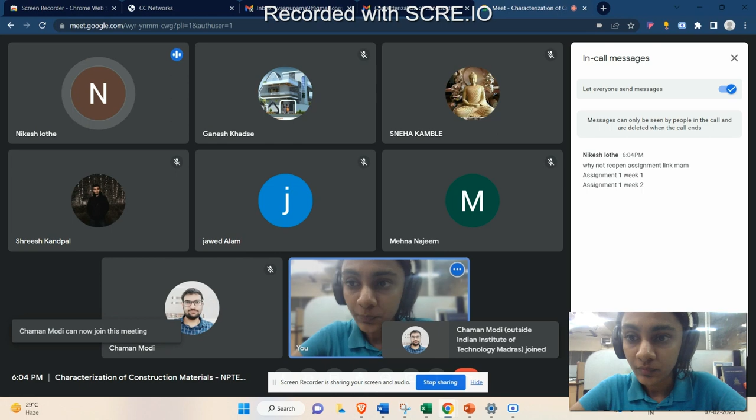Yeah, then it should be open. It has to be open. Is it the same for all the others? Then I'll raise the issue to the NPTEL coordinator team. If it is just for you, then you might have to try a different browser or try at a different time. Maybe the network is poor, something like that.

Okay. So let me try to share the screen. Please resend link. Yeah. Is the screen visible to you? No. No, ma'am. One second. Yes. Is the screen visible to you now? Yes, ma'am. Okay. So I'll just adjust it such that I can see the chat box and also the question screen.

So yeah. So this is a Characterization of Construction Materials course, and in the week one, it was just an overview. We didn't go in detail about the construction techniques. Instead, we just introduced what are the different construction materials which we will be dealing with, right? So, for example, the professor talked about cement, different composition of cement, then concrete, and also steel, polymers, asphalt, etc.

So, from all the content which was shared in week one, we have a few questions. So, I'll share the question on the screen in the slide form. You can see the question. I'll also explain the question through mic. So whichever you see as a right answer, you can mention it in the chat box. Okay. So moving on to the first question.

As per the cement chemistry notation, F denotes option A iron, option B FeO, option C Fe2O3, and option D Fe3O4. Okay, thank you, Shreesh. Shreesh has told that it is option C. Okay, I'm waiting for the others' replies. Chaman has also replied that it is C, which is Fe2O3. We have 8 attendees in the meet. So if you can respond in the chat box or through mic, it'll be good.

Okay, Sneha. So I guess majority goes with the option C, which is fairly easy. So the correct answer is C. As we know, cement chemistry notations are quite different from the usual chemical notations of elements. So C is not carbon, it is calcium oxide as per the cement chemistry notation. Similarly, S is not sulfur, it is silica or silicon dioxide. And alumina is A. F is Fe2O3 and it is not iron, Fe.

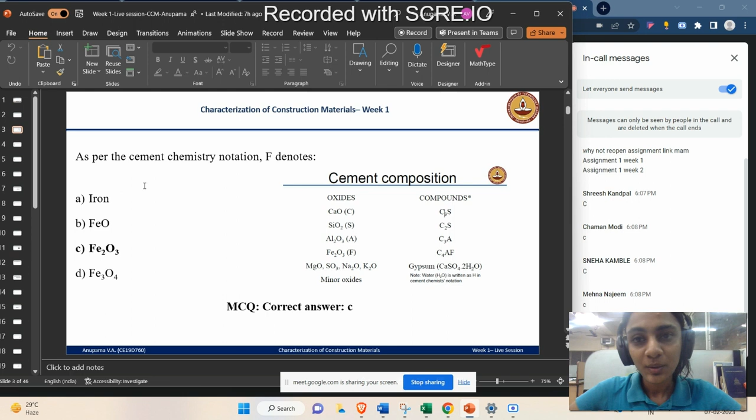The hydration product which regulates the alkalinity of ordinary Portland cement concrete is blank. CSH, CH, Ettringite, or gypsum. So we know that ordinary Portland cement concrete has a higher alkalinity. It has a high pH. And what is the hydration product in the ordinary Portland cement which causes higher pH or a higher alkalinity? Option A, CSH. Option B, CH. Option C, Ettringite. And option D, gypsum. So, which is the hydration product which regulates the alkalinity?

Okay, Shreesh and Chaman had commented that it's option B or CH. So, what is CH? Can someone type in the chat box? What is CH? Yes, Portlandite or calcium hydroxide. So, anyone else wants to comment? Is it CSH, CH, or Ettringite or gypsum which regulates the alkalinity?

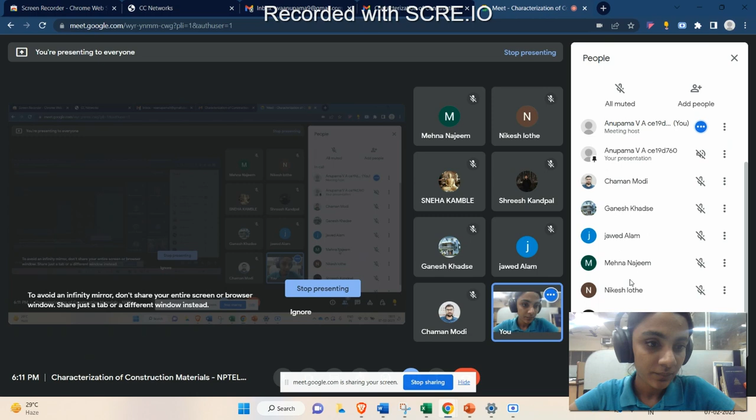Okay, I guess that is the response I'm getting. No more responses. Okay. Anyone else?

Okay. So it is calcium hydroxide or CH or Portlandite which results in the higher alkalinity of ordinary Portland cement concrete. It's not CSH, Ettringite or gypsum, it is calcium hydroxide. You must be quite familiar if you have taken basic or even advanced courses about concrete technology, that calcium hydroxide provides the basicity or alkalinity to the ordinary Portland cement concrete.

Thank you, Shreesh and Chaman, for responding in the chat box. So let's move to the next question.

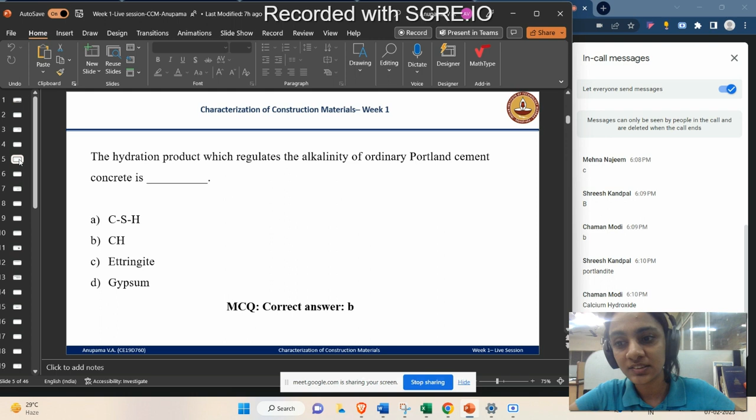The phase of the cement which contributes to the early strength and stiffening, and which has a high heat of hydration also. C3A, C3S, C2S, or C4AF. C3A is tricalcium aluminate, C3S is tricalcium silicate, C2S is dicalcium silicate, and C4AF is tetracalcium aluminoferrite.

So again, Shreesh and Chaman have gone with option A, that is C3A. Let's wait for a minute for hearing other opinions as well. Okay, Sneha also goes with C3A. Ganesh goes with A. Does anyone else want to respond? Okay, Mehna goes with A.

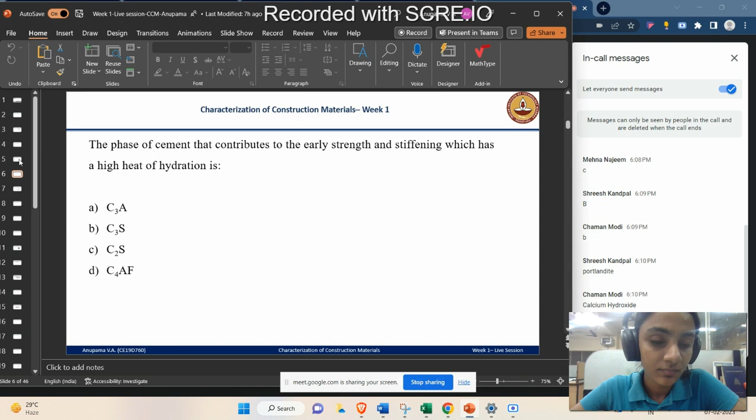Okay, now let's move to the correct answer. The correct answer is option A. So C3A is responsible for the early strength and stiffening. C3S is also responsible for early strength, but more than that, it's C3A which has a very high heat of hydration and also contributes to early stiffening. Okay, moving on to the next question.

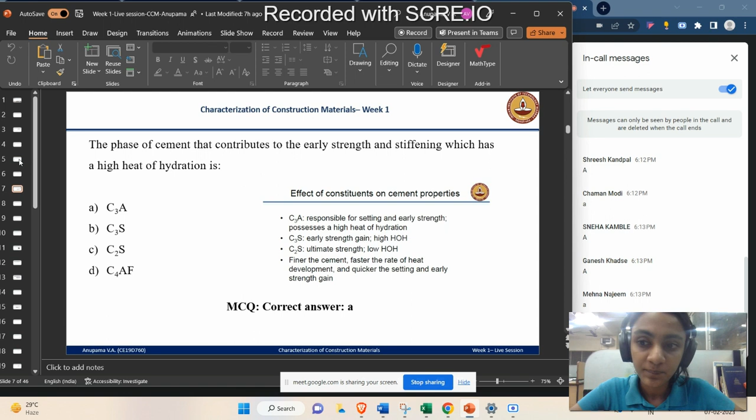Dimensional stability of a concrete is attributed to the aggregates present in it. State true or false. So, any concrete structure has got its dimensional stability. So, are aggregates a reason for the dimensional stability of a concrete? State true or false. Okay. So, Shreesh, Chaman, and Ganesh had gone with true, and Sneha as well.

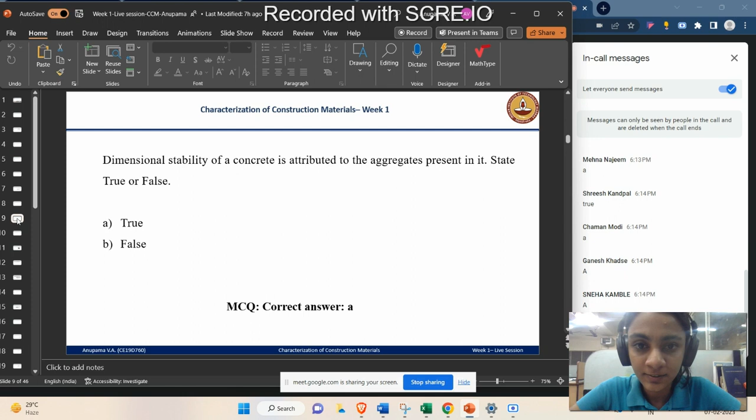Excuse me. Okay. Let's move to the correct answer. Correct answer is A, which is true. Aggregates are responsible for the dimensional stability because paste can be deformed and it binds the aggregates and the particles in the concrete, whereas aggregates cannot be deformed and they provide the stability in dimension for the concrete member. So let's move to the next question.

Okay, this is more related to characterization. In the backscattered image of an ordinary Portland cement concrete, pores in the hydrated cement paste are X color and unhydrated cement grains are Y color. So identify X and Y. X is black, Y is white. Then X is white, Y is black. Then X is gray, Y is white. Then X is black and Y is gray.

Okay, Shreesh went with option C, Chaman with option A. Okay, now this is the first question with different opinions. Shreesh also changed to A, Ganesh A. So now everyone goes with A. Do we have any other difference of opinion from someone?

So make sure you understand what feature we are referring to here. One is a pore, the other one is an unhydrated cement grain. Also, it's backscattered imaging.

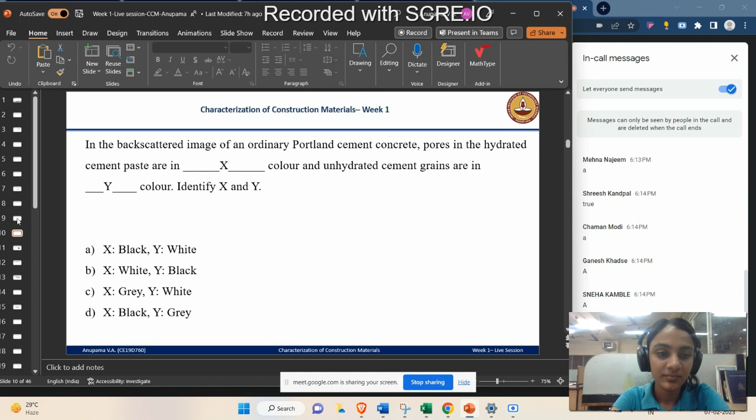So far we have received only three responses. What happened to others? It's okay even if the answers go wrong. Consider this as a practice session. That's all the response I'm going to get, I guess.

Okay, so let's move to the correct answer. Correct answer is A. This is also a snippet from the slide. If you see, there is a black semicircle, which actually is a pore. So what happens in backscattered imaging? It provides the image based on the density difference of the material. In a pore there is nothing to scatter back, so it shows in black, whereas cement grains are very highly dense and much brighter. So the denser phase, that is a cement grain, will be shown in white.

All the other hydration products will have a density ranging between that of a pore and that of an unhydrated cement grain, as a result of which they will be shown in different shades of gray or ash. So here all these small white elements are unhydrated cement grains, and the black one is a pore. Keep that in mind. A pore is black and an unhydrated cement grain is white in backscattered imaging. So the correct answer is A.

Thank you guys for responding. Now moving on to the next question.

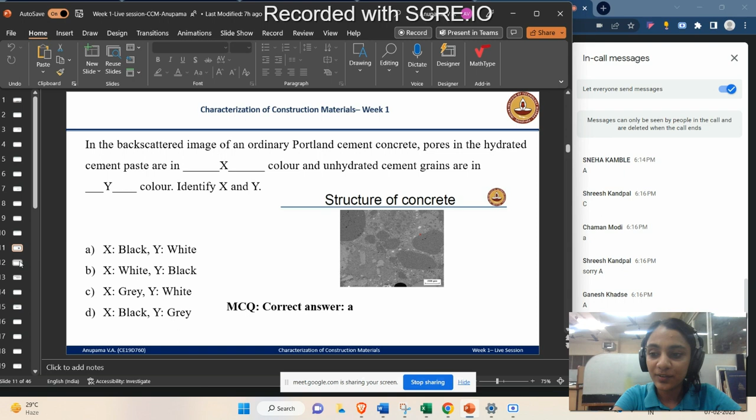The pores present within the hydration products in the ordinary Portland cement concrete are known as X. Identify X from the options given below. What is X? Are they air voids, or are they gel pores, or are they capillary pores? So here we told that the pores are black in color, but pores exclusively within the hydration products, what are they known as? Are they air voids, gel pores, or capillary pores?

Okay. Shreesh has commented that it is gel pores. Okay, let's wait for more response from others. Okay, Ganesh told it is capillary pores. Anyone else? Okay, I'll wait for a minute. Let me see. Please feel free to respond in the chat box. Even if it goes wrong, it is okay. That's all. No one else is planning to respond.

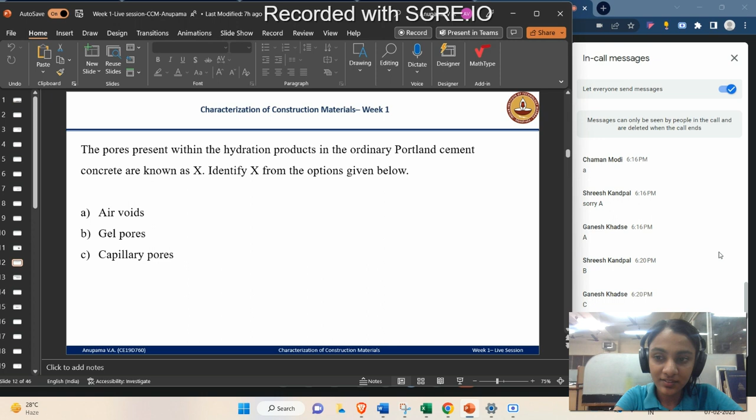So within the hydration product, that is say CSH, there are so many pores that they are known as gel pores. But outside the hydration product, that is within the cement paste itself, other pores are there and they are known as capillary pores. So cement paste is composed of two types of pores. One is a capillary pore and the other one is a gel pore.

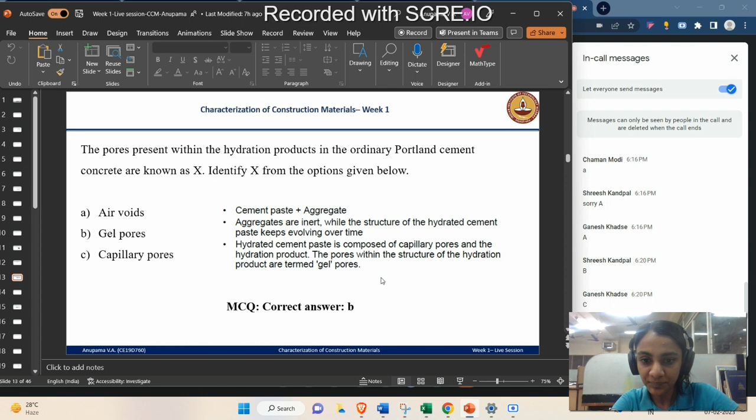Okay, so next question is also related to pores itself. With reference to the previous question, what is the pore which is present within the hydration product? So according to Powers, what percentage of the total pores are X? So X is now gel pores. According to Powers, what percentage of the total pores are X? 25 percentage, 50 percentage, 33.33 percentage, or 66.66 percentage.

Okay. Shrish commented that it is C, that is 33.33 percentage. Excuse me. Okay, Sneha also commented it is C. Let me wait for a little more. Ganesh also commented it is C. What about others? Does anyone say it is 66.66? Okay, I'll wait for less than a minute, maybe. Yeah, I guess not sure. Okay, let's see.

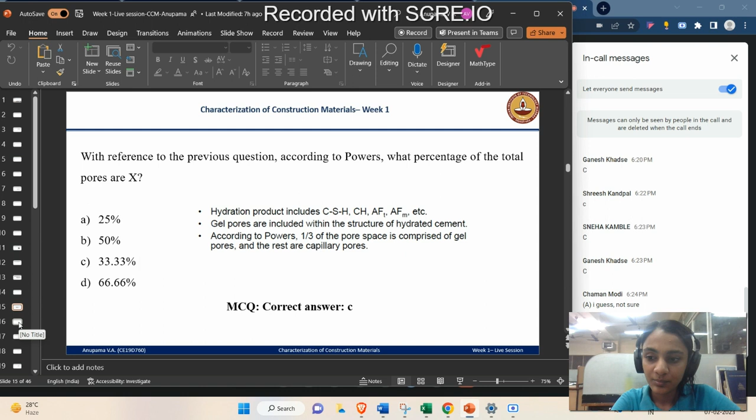Okay, moving on to the next question. Tar dissolves in gasoline, whereas asphalt does not. State true or false? The question is tar dissolves in gasoline, whereas asphalt does not. State true or false?

Okay, Ganesh and Shrish go with true. Chaman also goes with true. Sneha goes with true. Okay, let me wait for a little bit more time.

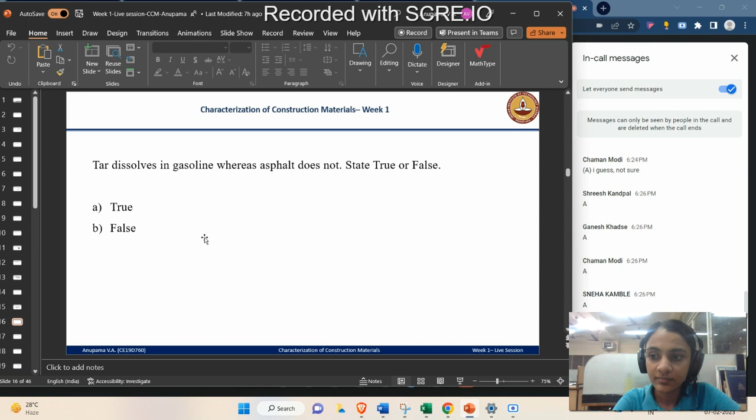Okay, the correct answer is false.

Okay, there's a new person. He or she had gone with A. What's your name? I couldn't get it. The newly joined one, can you type your name? Like how I should call you out? Yeshu Kumar. Okay, fine. Thank you.

So this is the refining stages of asphalt. From liquid gas or propane, it becomes naphtha, then petrol, then kerosene oil, grease, and then it becomes asphalt. So it has been refined from gasoline, which means that it can further dissolve in gasoline also.

That is why, in the case of asphalt pavements, suppose there is petrol dripping from some vehicle, the asphalt can dissolve in that petrol, and that particular area of the flexible pavement or the asphalt pavement can deteriorate. That is because if there is no top surface protection layer, if it is just asphalt, then it can dissolve in the gasoline and deteriorate the pavement.

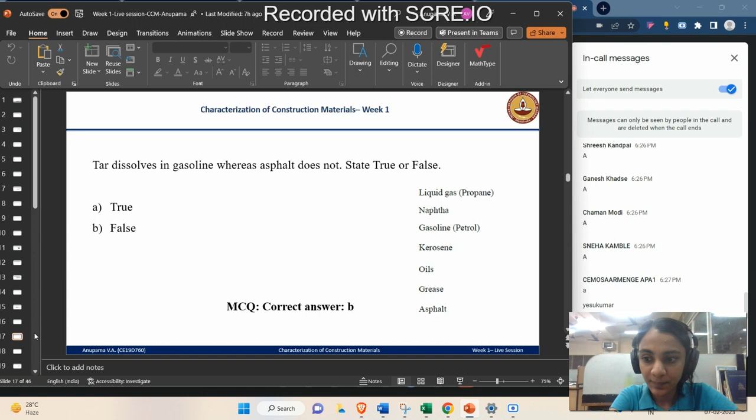So that is why the asphalt tends to deteriorate in the presence of gasoline or when gasoline falls over the asphalt layer. So the correct answer is B, which is false. Okay, moving on to the next question.

Suspending asphalt in water using an emulsifying agent dash. It increases the viscosity of the asphalt, it decreases the viscosity of the asphalt, or it does not alter the viscosity of asphalt. So, what does asphalt suspension in water using an emulsifying agent do? Does it increase the viscosity? Does it decrease the viscosity? Or it does not alter the viscosity of asphalt?

Okay, Chaman goes with does not alter. Shrish and Ganesh go with decreases the viscosity. Okay, now let's wait to hear others' opinion. Okay, Yeshu Kumar goes with increases the viscosity. Okay, any other response? Any other opinion from others?

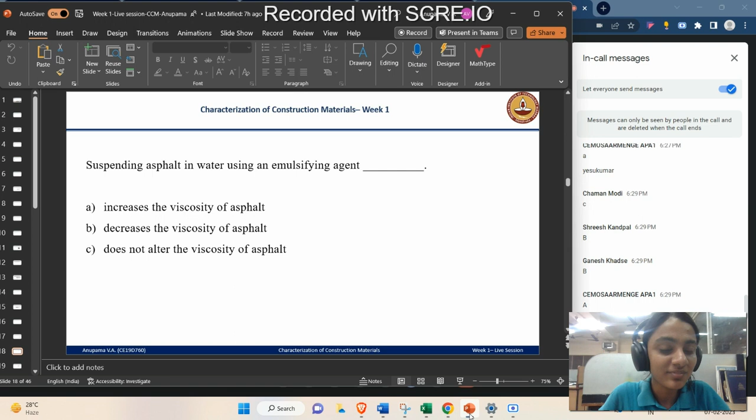So the question is pretty simple. Using an emulsifying agent, if you just suspend asphalt in water, what does it do? Does it alter the viscosity? Option A says it increases the viscosity. Option B says it decreases the viscosity. And option C says it does not quite alter the viscosity of asphalt. And we have got all the three options as answers from the chat box. So, yeah. Okay, without further ado, let's move to the correct answer.

The correct answer is that it decreases the viscosity of the asphalt. So it becomes much easier to work with if you decrease the viscosity. So if you see the asphalt properties slide, the second point indicates techniques to lower viscosity, and the second one is making an emulsion. Okay, so keep that in mind. If you make it an emulsion, by suspending asphalt in water using an emulsifying agent, then it decreases the viscosity. Okay, so moving on to the next question.

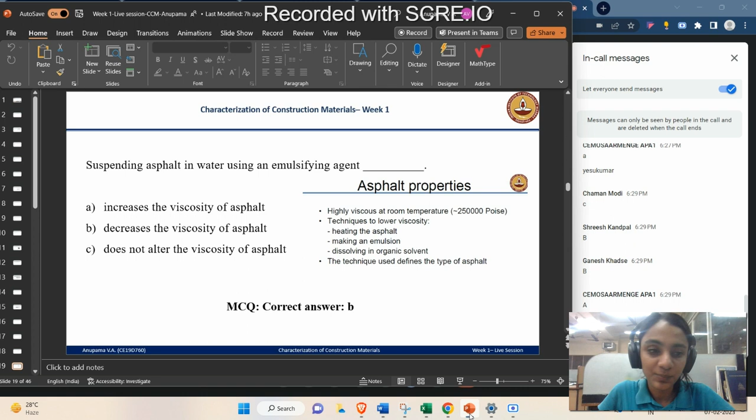Crude oils are considered to be asphaltic when the asphalt content is greater than 60 percentage, greater than 50 percentage, greater than 70 percentage, or greater than 55 percentage. So we refer to crude oil as asphaltic if the asphalt content is greater than 60 percentage or 50 percentage or 70 percentage or 55 percentage.

Okay, Shrish has commented that we call them asphaltic if the asphalt content is greater than 60 percentage. Okay, Ganesh commented that if it is greater than 55 percentage, we call them asphaltic. Okay, who else? Excuse me. Okay, Yeshu Kumar says it is greater than 50 percentage. Okay, anyone says it is greater than 70 percentage?

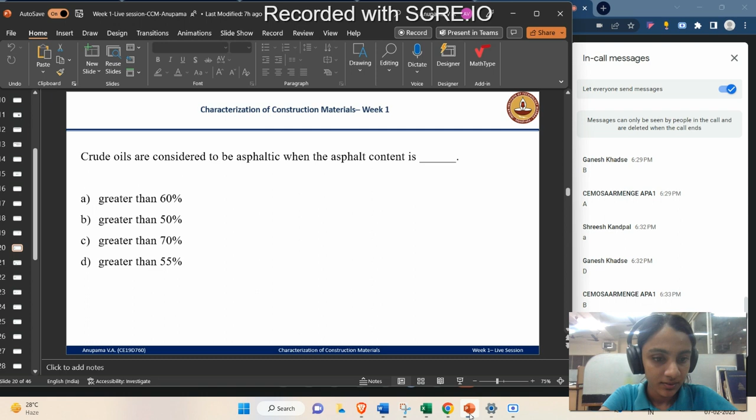Okay, let's wait for a few more seconds before going to the correct answer. Excuse me. Okay, let's move to the correct answer.

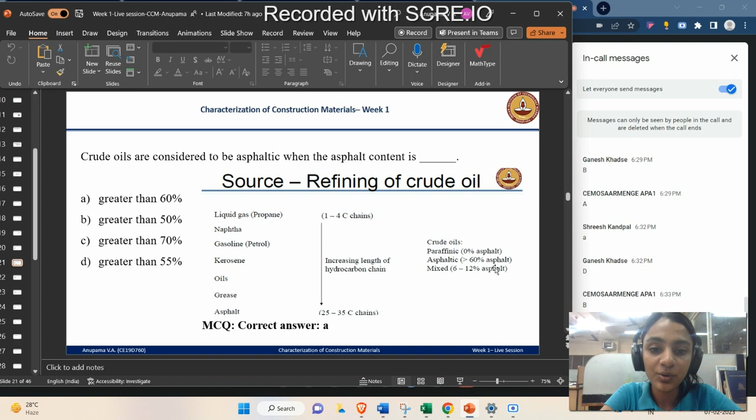The correct answer is option A, that is greater than 60 percentage. So if you see here, this is a snippet from the slide. So crude oil is paraffinic if it has 0 percentage asphalt, and if it has 60 percentage asphalt or more, it's known as asphaltic. And if it is 6 to 12 percentage asphalt content, then it is a mixed crude oil. Okay, so keep that in mind. If it is greater than 60 percentage, then the crude oil is known as asphaltic. Okay, let's move to the next question.

To get a homogeneous asphalt concrete mix, the placement temperature must be between 70 degrees Celsius to 80 degrees Celsius, or 80 to 100, or 100 to 125, or 125 to 150. So this is regarding the placement temperature of asphalt concrete mix. What we all need is a homogeneous mixture. We don't want lumps. We don't want heavy viscous and then changing to low viscous, etc. What we need is a homogeneous mixture.

So to get a homogeneous mixture, the placement temperature has to be between 70 to 80, 80 to 100, 100 to 125, or 125 to 150. I'm waiting for responses. Anyone? Okay, now I'm confused. Okay, Yeshu Kumar commented it has to be between 100 and 125. Shreesh comments it's between 125 and 150. Okay. Ganesh goes with 80 and 100. Okay, interesting. So, anyone for option A?

What about the girls? I'm not seeing anyone in the chat box. Some used to answer. What happened to them? Where is Mehna, Harshita, Sneha? Okay, let's give them a few more seconds.

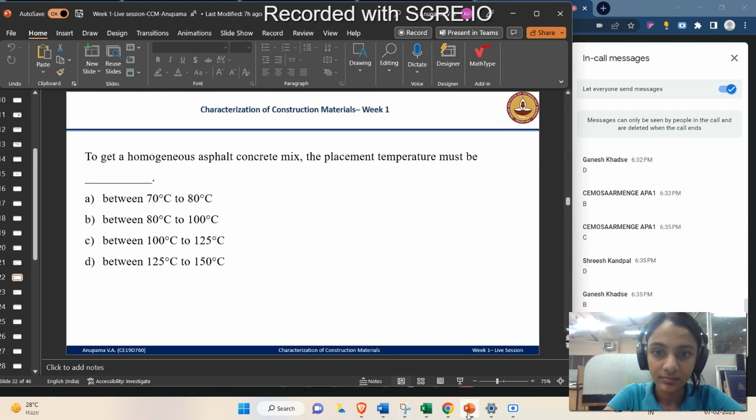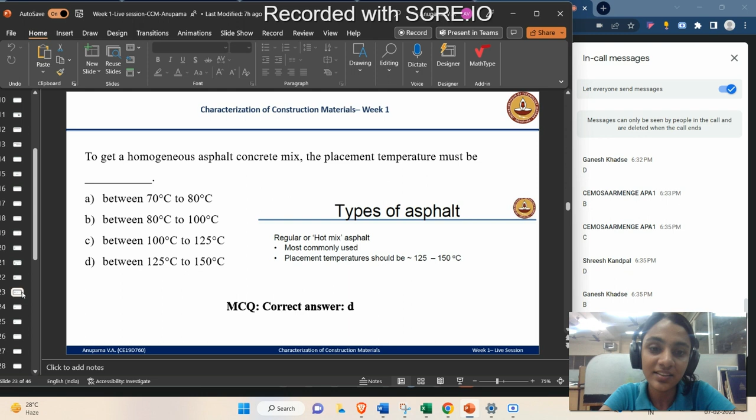Okay, let's move to the correct answer. The correct answer is option D, between 125 and 150 degrees Celsius. Okay, to get a homogeneous mixture, the temperature has to be between 125 and 150 degrees Celsius. Okay, let's move to the next question.

Now, with reference to the previous question, it's regarding the placement temperature of asphalt concrete. At that range of temperature, asphalt exists as glassy solid, viscoelastic liquid, or Newtonian fluid. So you know now that the temperature range which we are talking about is 125 to 150 degrees Celsius. So what is the state of asphalt at that temperature? Is it a glassy solid, or viscoelastic solid, or viscoelastic liquid, or Newtonian fluid?

Okay. So Chaman went with viscoelastic solid. Thank you for responding in the chat box. What about others? Okay, now everyone goes with viscoelastic solid. Mehna and Sneha. Ganesh also goes with viscoelastic solid. Shreesh goes with viscoelastic liquid. Okay, I think we have given enough time to answer. So let's move to the correct answer.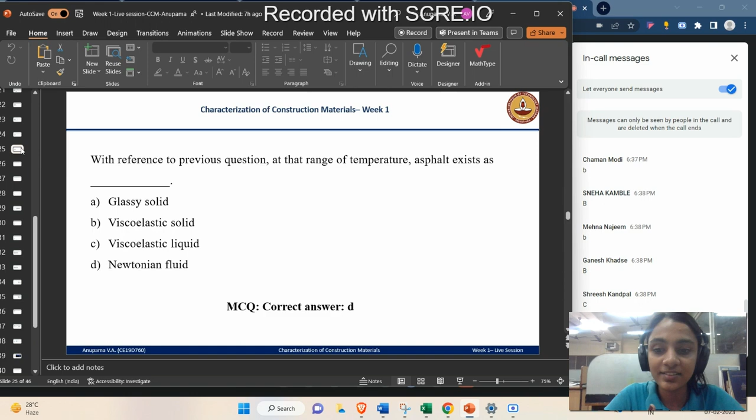So then it changes from viscoelastic solid to viscoelastic liquid. Then finally it becomes a Newtonian fluid. So the correct answer is option D. Okay, let's move to the next question.

The fatigue resistance of asphalt concrete pavement increases with the load repetitions. So this is quite interesting, right? When the number of load repetitions increases, we think it will wear and tear. That set apart, the fatigue resistance of the asphalt concrete also tends to increase. Why does it happen so? First, binder hardness increases. Secondly, aggregate hardness increases. Or air voids between the binder and the aggregate collapse or decrease. Or option D, asphalt changes from viscoelastic solid to a glassy solid.

Okay, let's see. Shreesh and Chaman went with option C, that is the air voids between the binder and the aggregates decrease. Anyone else? Okay, Jawed goes with aggregate hardness increases. What about others? Anyone else? Ganesh goes with binder hardness increases. Okay, so let's move to the correct answer.

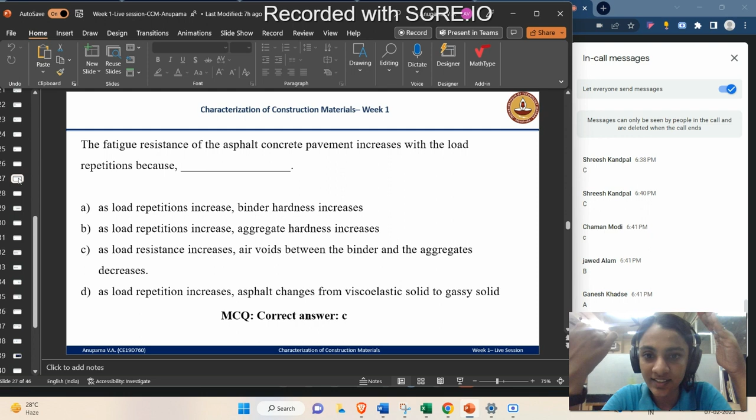Correct answer is option number C. See, the binder hardness cannot change, and the aggregate hardness also is something which does not undergo a change of properties if you keep on increasing the load repetitions. So what logically can happen when the number of load repetitions increases is that there will be some air voids between the aggregate and the binder. Those will collapse, or the gap becomes lesser and lesser. So the air voids tend to decrease with the number of load repetitions.

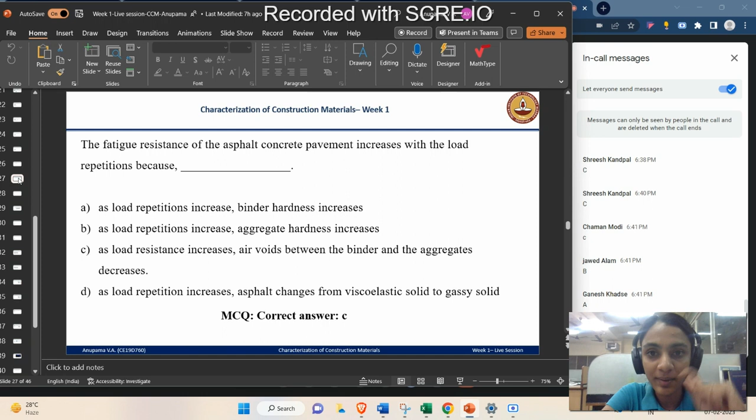So as a result of which, the fatigue resistance of the asphalt concrete increases with the load repetitions. So the correct answer is option C. Those who have told other options, please stay corrected. So fatigue resistance of the asphalt concrete increases with load repetitions because the air voids between the binder and the aggregate decrease. Okay, so let's move to the next question.

How much percentage of carbon is present in alpha iron at room temperature? So it's a pretty straightforward question. In alpha iron at room temperature, how much is the percentage of carbon? Is it 50 percentage, 0 percentage, 65 percentage, or 67.7 percentage? It's a pretty straightforward question. Not much of logic or thought needs to be put to answer this.

Okay, Chaman goes with option B, that is 0 percentage. Anyone else? Okay, Shreesh also goes with B, that is 0 percentage. Okay, or D, I'm confused. I think it's just the human brain: when you see something which is not conforming to the other options, 67.7 percentage, where did it come from? So I get where the confusion comes from. Okay, let's see. I'll wait for a few more seconds.

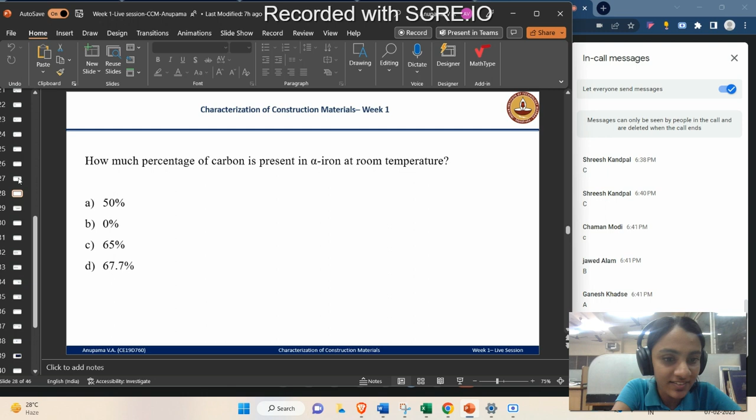Okay, I think that's all I'm getting. Everyone else seems to be confused. So the correct answer is option B. D is not the correct answer. It's option B because at room temperature, it is the purest form of iron, that is alpha iron.

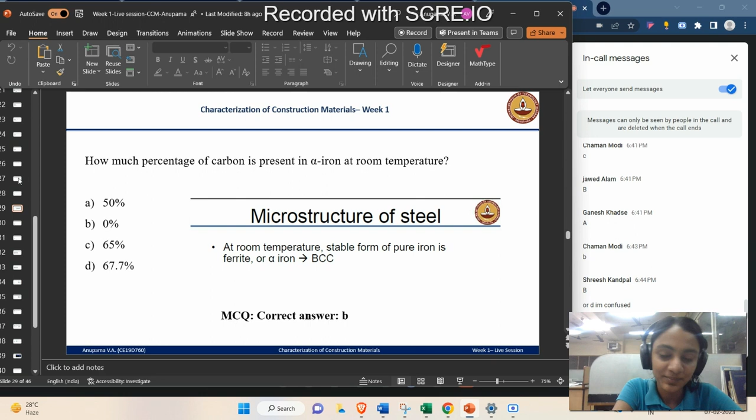It has no carbon content, or even if it has, it's a very minute level of carbon content, and we can say in 99 percent of cases there is zero carbon content in the case of alpha iron. So it is the purest form of iron, alpha iron, and at room temperature there's no carbon content in it. That is 0 percent. Okay. So moving on to the next question.

What material property is introduced by the addition of carbon to iron in the manufacturing of steel? Is it malleability, ductility, toughness, or hardness? So, it's about the property which gets introduced by the addition of carbon to iron in the steel manufacturing process. So, Shreesh again commented it is D, hardness. Okay. Anyone else?

So basically, what he says is that by adding carbon, we are improving the hardness, or we are imparting hardness to the iron or the composite. Okay, Chaman also goes with D, hardness. Ganesh also goes with D. Anyone else?

Okay, let's move to the correct answer. I think it was a pretty straightforward question. So the correct answer is D. By introducing carbon into iron in steel manufacturing, we are introducing hardness to the system, or we are giving more hardness to iron when you add carbon to it. Okay, so let's move to the next question.

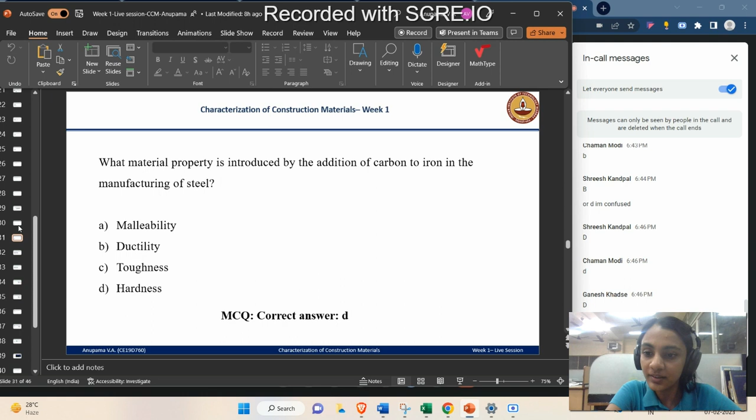Which of the following phenomena occurs at the eutectoid point? Option A, one solid transforms into two different solids. Option B, one liquid transforms into two different solids. Or one solid transforms into two different liquids. Or one liquid transforms into two different liquids. Okay. So, Shreesh commented it is one liquid which transforms into two different solids.

Let's hear from others also. I'm just waiting to listen to others' opinions. Okay, Ganesh goes with D, that is liquid to two different liquids. Who else? There are at least 8 others in the group attending the session, so please feel free to answer.

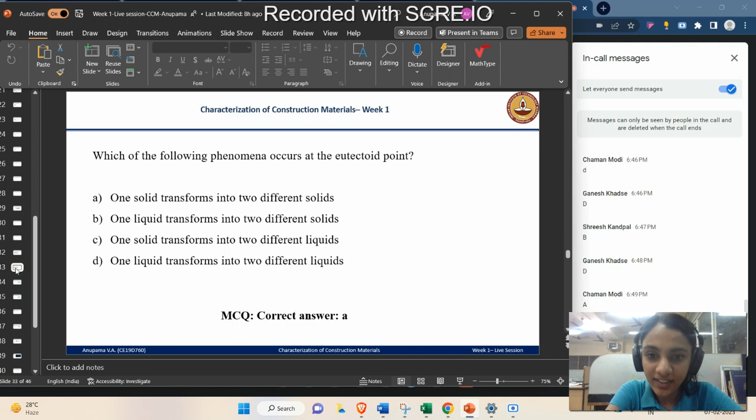Choose the weight percentage of carbon in the iron carbon solid solution at which the eutectoid transformation occurs: 0.77 percent, 4.3 percent, 2 percent, or 6.7 percent. Okay, Chaman, Shreesh, and Mehna went with option A, that is 0.77 percent. Waiting for others to respond.

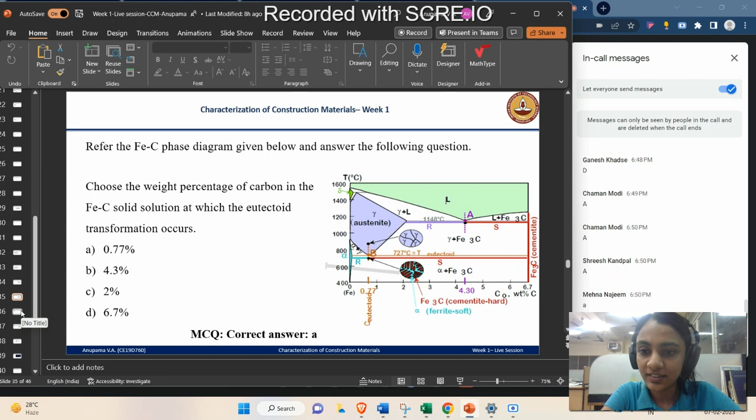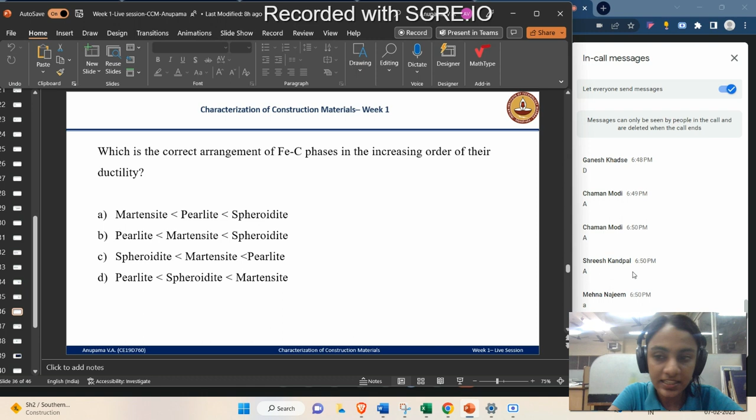Anyone else? So I have two option A's and one option D. Okay, so let's move to the correct answer. Correct answer is option A. So this again is a snippet from the slide.

So here the ductility arrow goes down. So it's a general trend. Spheroidite is very ductile, in the middle comes pearlite, and martensite is least ductile. It has a higher strength though, but according to ductility, spheroidite is most ductile and martensite is least ductile. So the correct answer is A. Okay, let's move to the next question.

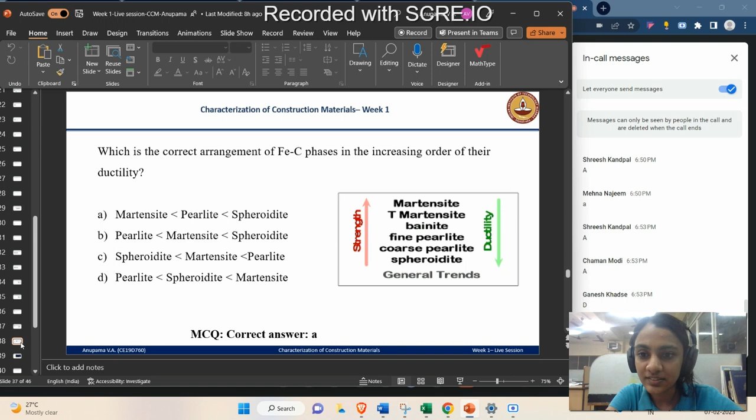Pearlite is by moderate cooling. Second one, that is bainite, is by slow cooling. 3A, that is martensite, is by rapid cooling. That is option A. Similarly, there are three more other options. So let's see who answered.

Okay, Shreesh answered option B. So he says, okay, one second. He says one is B, that is pearlite is by slow cooling, bainite is by moderate cooling, martensite is by rapid cooling. Right? Yeah, that's what he says. Okay, yeah. Anyone else wants to comment?

Okay, Chaman also goes with option B. Ganesh goes with B. Okay. Anyone else? Mehna? I think her name was Mehna. Mehna, right? Yeah, Mehna. Anyone else who has a difference of opinion or wants to confirm that it is B? Option B.

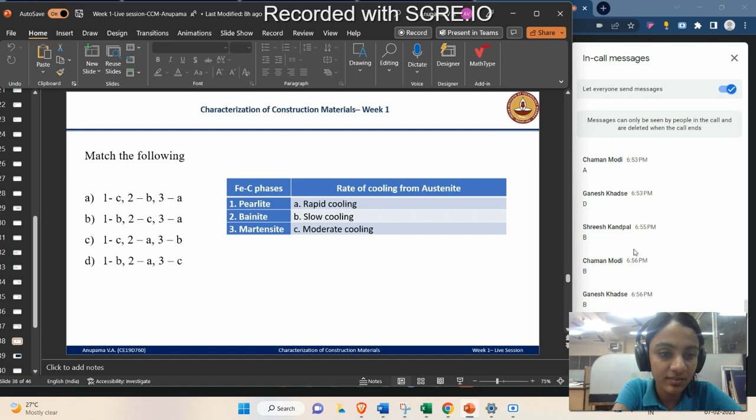Okay, let's move to the correct answer. Yeah. So the correct answer is option B. So austenite, it's a gamma. It undergoes slow cooling to form pearlite. It undergoes moderate cooling to form bainite. And it undergoes rapid quenching or rapid cooling to form martensite. And when it is reheated, it becomes tempered martensite.

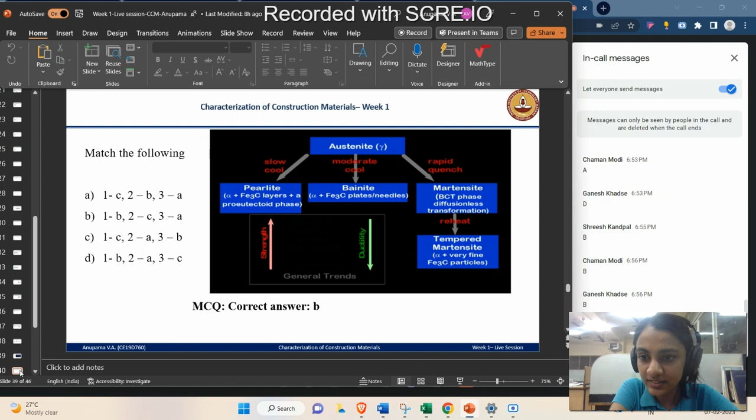Okay. So slow cooling pearlite, moderate cooling bainite, and fast cooling or rapid quenching is martensite. So the correct option is option B. Okay, let's move to the next question. The 415 in Fe 415 indicates the yield strength. State true or false. So it's a very easy question.

Okay. Chaman, Ganesh, Shreesh, everyone goes with true. Okay. Yes, the correct answer, because I don't think I have to wait any more for any more responses. Everyone, the correct answer is A. That is Fe 415, and 415 is the yield strength. Okay. So let's move to the next question.

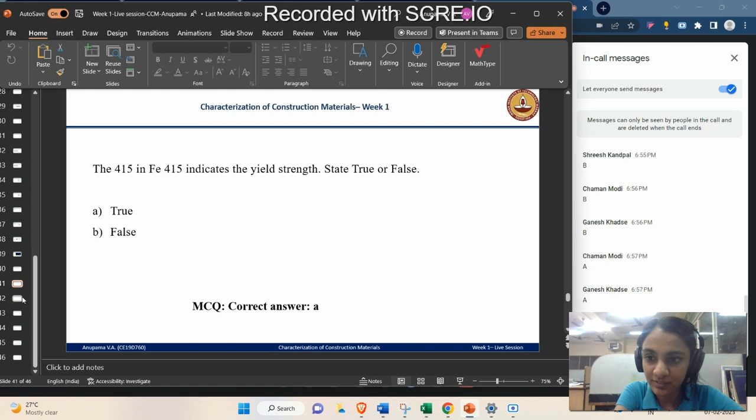Oh, okay. I don't know. 6:58 p.m. I think Jawed and Chaman replied for this question. I hope. Okay, Ganesh goes with false. Shreesh goes with false. Okay. Okay. So let's move to the correct answer.

Correct answer is true because in the case of a QST rebar or quenched self-tempered rebar, the outer layer is a tempered martensite layer and the inner layer is a ferrite pearlite layer. The outer one has a higher strength and corrosion resistance because the outer layer has to be more corrosion resistant than the inner layer, right?

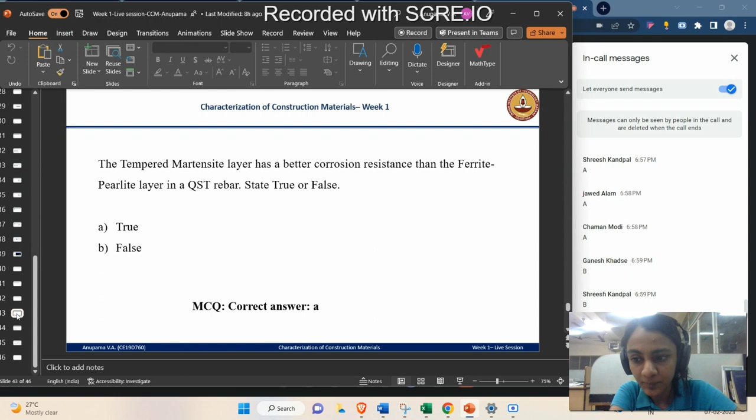Because it is from the outer layer that the corrosion proceeds or progresses further inward. So it is desirable that the outer layer has a better corrosion resistance than the inner layers. So the tempered martensite layer has a better corrosion resistance than the inner ferrite pearlite layer. Okay, let's move to the last question for today.

That is, which of the following is the correct arrangement of polymer configurations in the increasing order of their Young's modulus? So I'll read the question again. You have to arrange the following polymer configurations in the increasing order of the Young's modulus. So which has a higher Young's modulus?

According to option A, network has least and linear has more. According to option B, cross-linked has least and network has more. According to option C, linear has least and network polymer has more, the higher Young's modulus. According to option D, it is network which has least and cross-linked which has more. Okay, I think I have got many responses.

So okay, everyone goes with option C. That is linear less than cross-linked less than network. Shreesh, Chaman, Sneha, and Ganesh, thank you for responding. I'll wait for 1 more minute. Okay, Jawed goes with D. Ganesh goes with C. Okay, he goes with A.

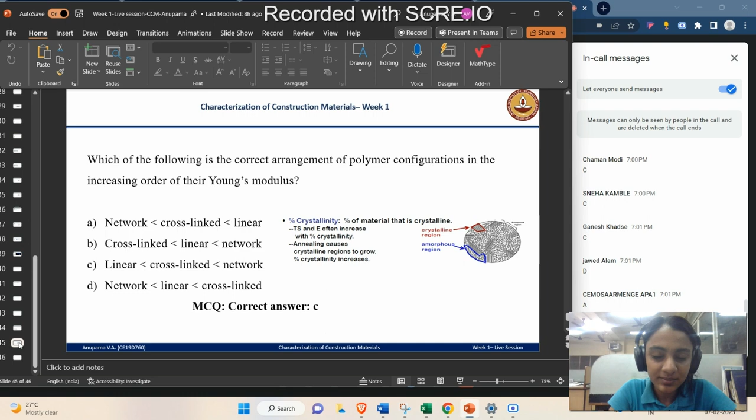Okay, so let's move to the correct answer. The correct answer is C. That is, as the crystallinity increases, the Young's modulus also increases, or crystallinity increases, E also increases. In that case, network has the highest Young's modulus, then comes cross-linked, and last comes linear. So, linear less than cross-linked less than network.